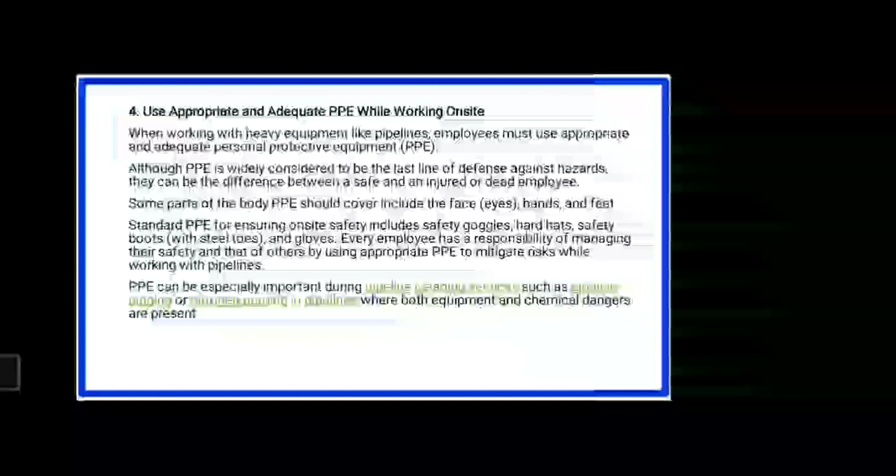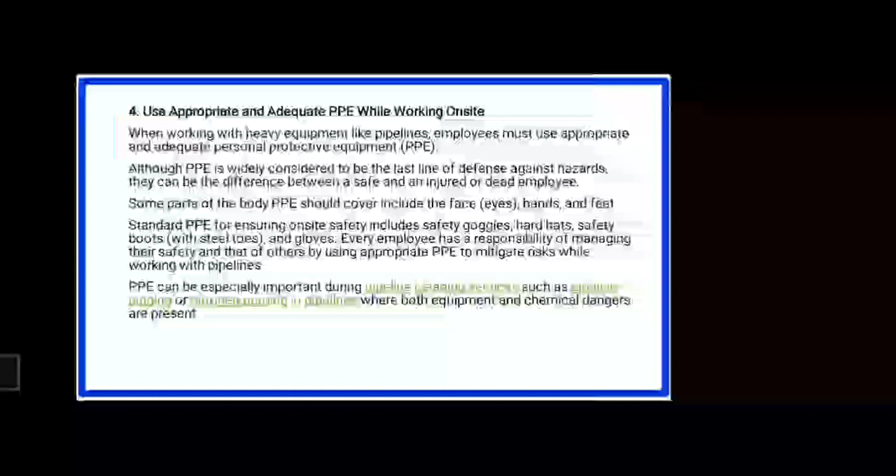We must take care about the PPEs, especially important during the pipeline cleaning services, pipeline pigging process, and nitrogen purging process. The fifth point is ensure adequate training for operators of heavy duty machineries.

So when there is a need of excavators, forklift trucks, some other trucks, cranes, etc., for operating these types of heavy duty machineries, the operator should go through specific training and they should follow the operations and maintenance manual to avoid any type of incident or accident.

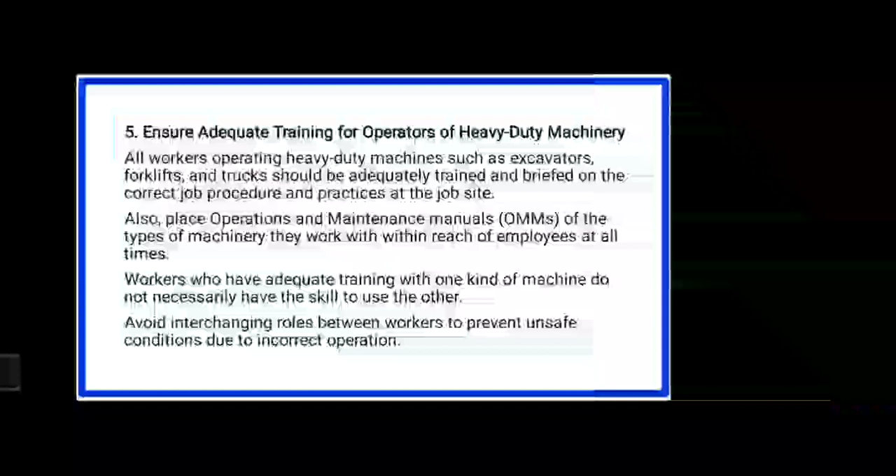The sixth one is inspect all tools used on site. While operating these types of heavy duty machineries, while operating excavation activities, while doing various types of works, we need specific tools.

Before starting the actual job, we must go through the toolbox talks. And in these discussions also, we should inspect all these types of tools before utilizing them on-site.

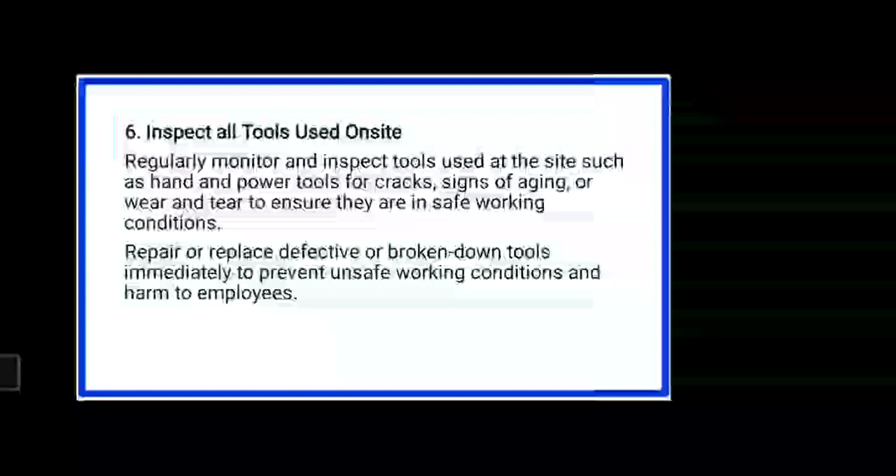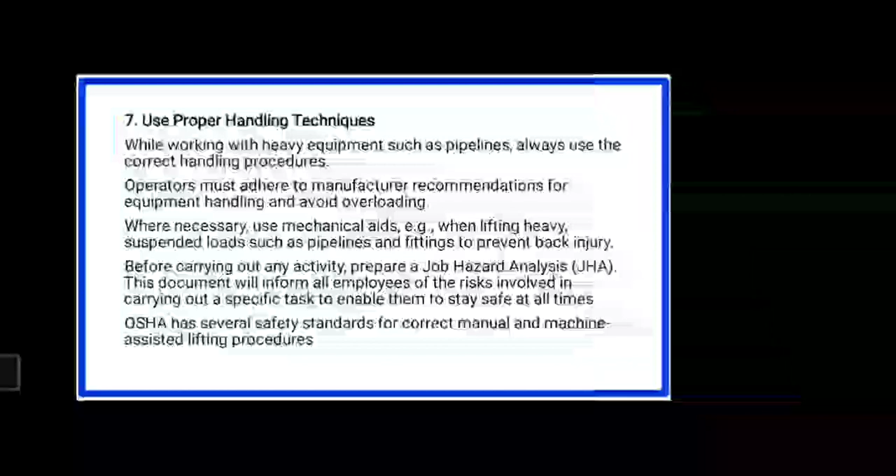The seventh point is use proper handling techniques. While doing different activities on-site, especially pipeline activities, when we are lifting heavy suspended loads because there are heavy pipelines and fittings, if we are doing all these things manually, then there are chances of back injury.

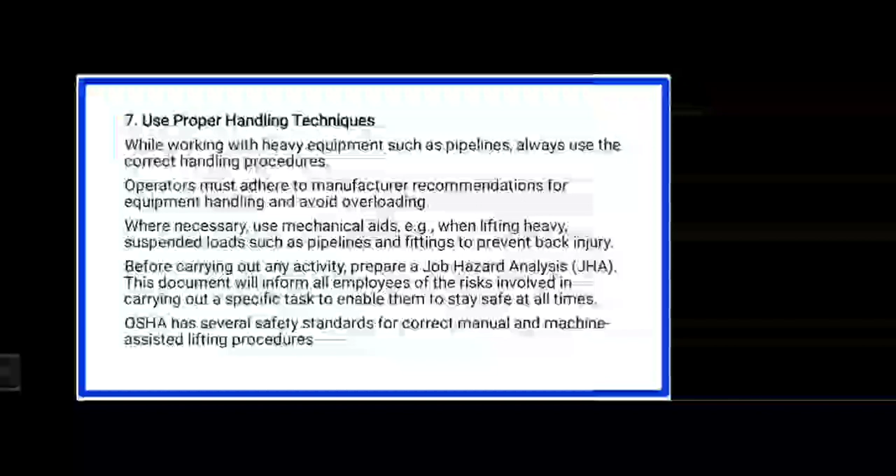But if it is done by heavy cranes, then we can avoid the ergonomic hazard. So for each and every activity, we must go for the job hazard analysis so that we can reduce or eliminate the risk and avoid different types of hazards.

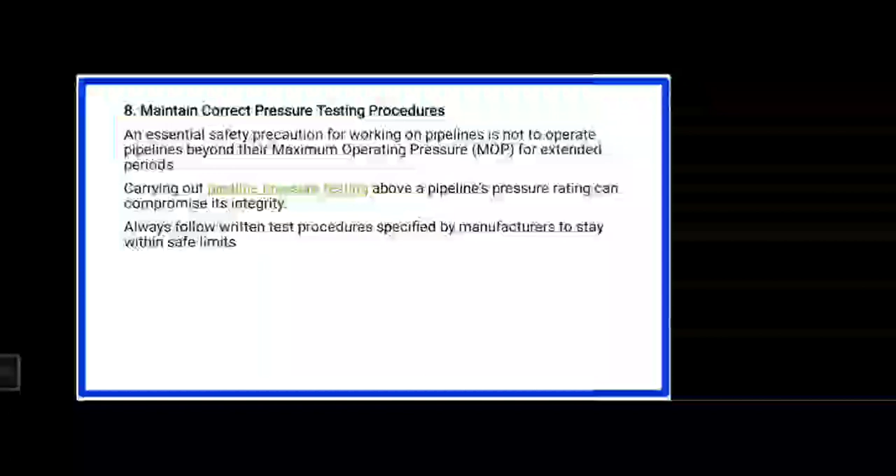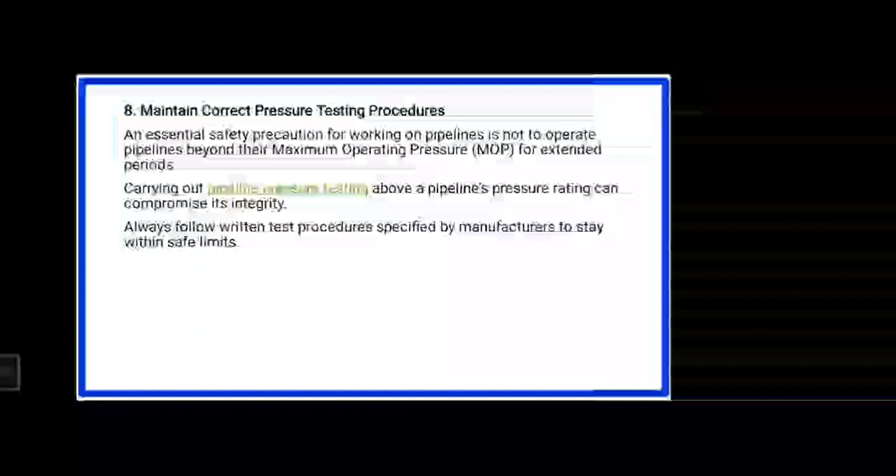The next point is maintain correct pressure testing procedures. As discussed in the pigging process, cleaning process, servicing process, or nitrogen purging process, there are different operations which need specific testing guidelines and specific testing pressure, given under different acts, rules, or standards. We have to follow all these standards or rules and regulations while testing these equipment or processes.

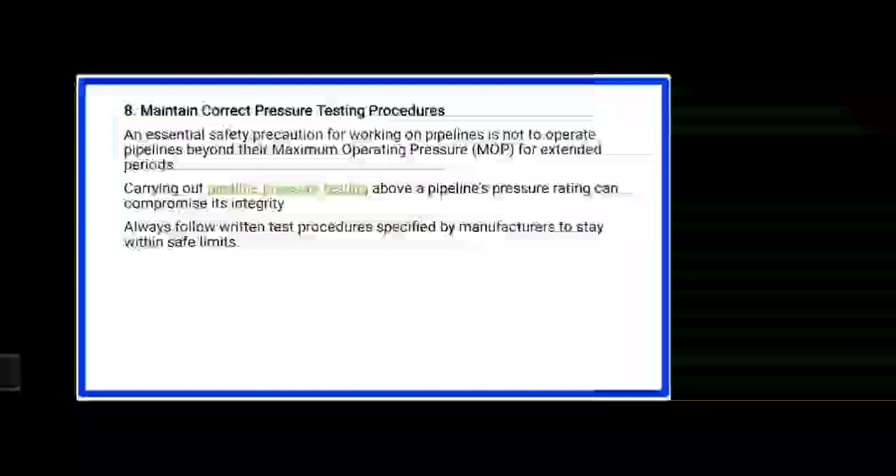Then there is a main parameter called preventive maintenance. We all know that if there is a breakdown or emergency, that maintenance activity is called breakdown maintenance or emergency maintenance. But if you want to avoid any type of maintenance on the 11th hour or after breakdown, then we must go for preventive maintenance.

Prevention is better than cure. That phrase we know, and on that basis only this preventive maintenance can be worked out.

We have to observe and supervise each and every operation, each and every activity, so that we can easily predict that this particular process or machinery requires lubrication, this requires replacement, this requires replacement of a small component, or that may be isolation, etc.

Whatever it may be, we have to observe each and every activity and predict some of the maintenance process, and that should be done under this preventive maintenance.

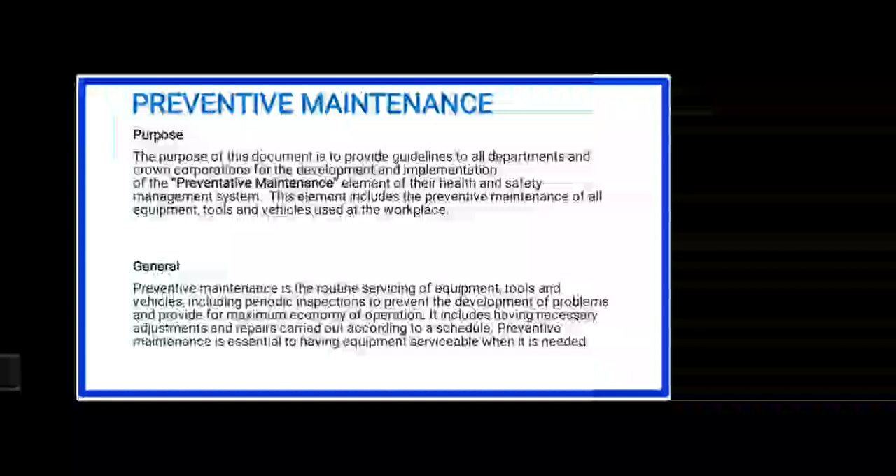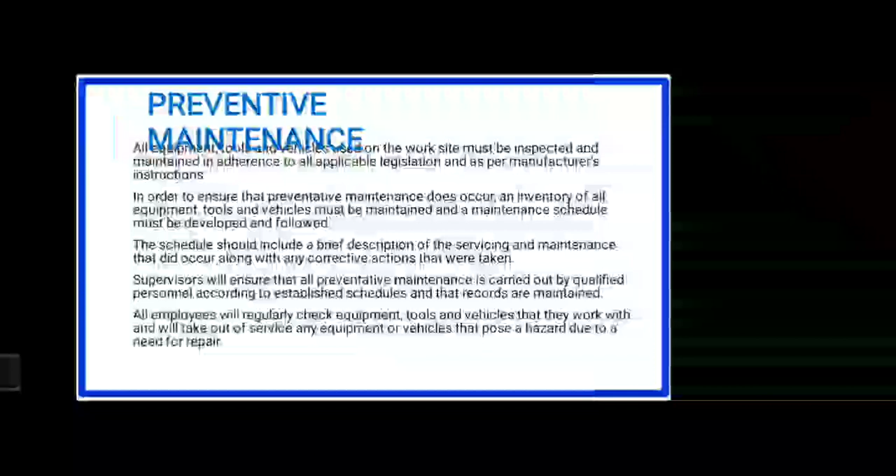Under this preventive maintenance, all equipment, tools, and vehicles used on the work site must be inspected and maintained in adherence to all applicable legislation and as per the manufacturer's instructions.

In order to ensure preventive maintenance does occur, an inventory of all the equipment, tools, and vehicles must be maintained, and a maintenance schedule must be developed and followed.

Planning, execution, and repetition of these activities is very important, and that is why micro level supervision, micro level observation and planning is one of the skills in preventive maintenance. Supervisor's observation is very important in this type of preventive maintenance.

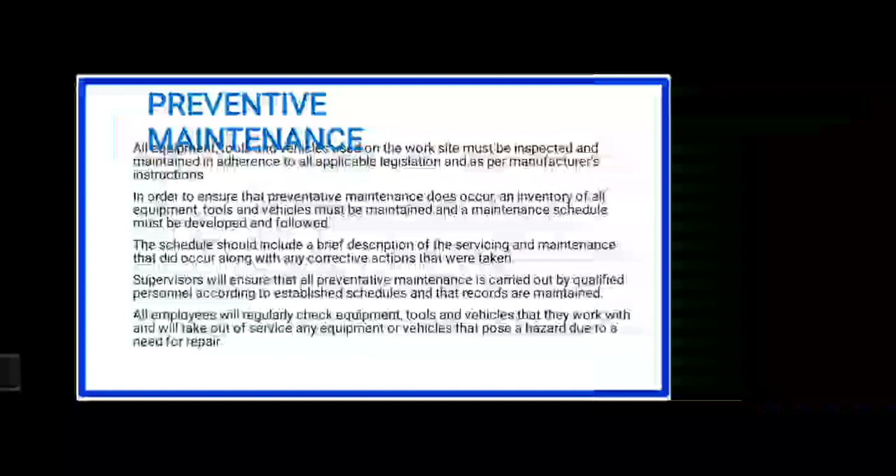Then another maintenance type is emergency maintenance. It is a type of reactive maintenance because we are doing the maintenance after an emergency situation, used to prevent a threat to lives, property, profitability or viability of an organization.

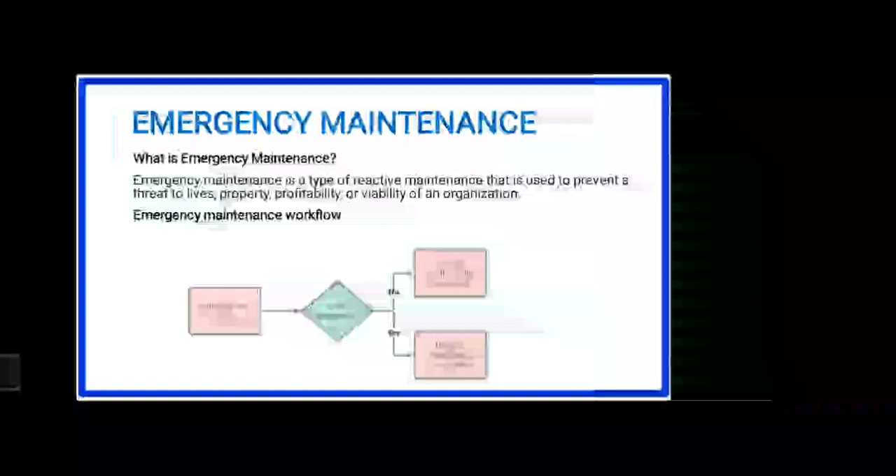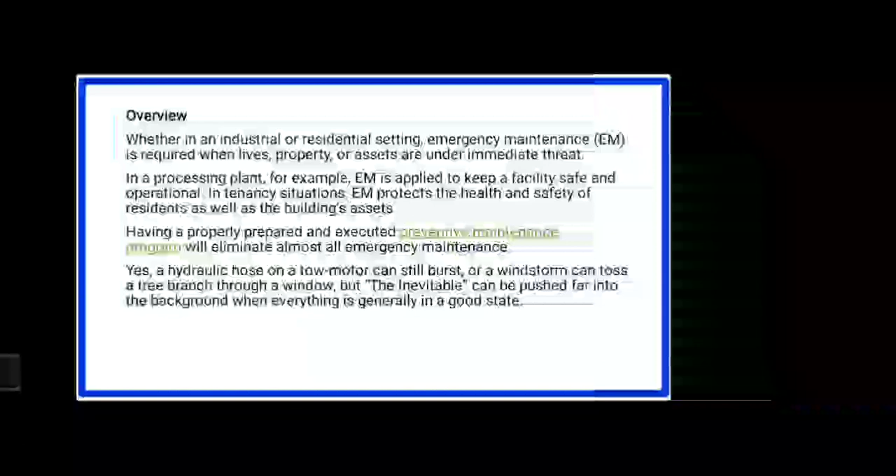So whether it is in industry or in residence, emergency maintenance is required when lives, property or assets are under immediate threat. We have to go for this emergency maintenance on the first priority.

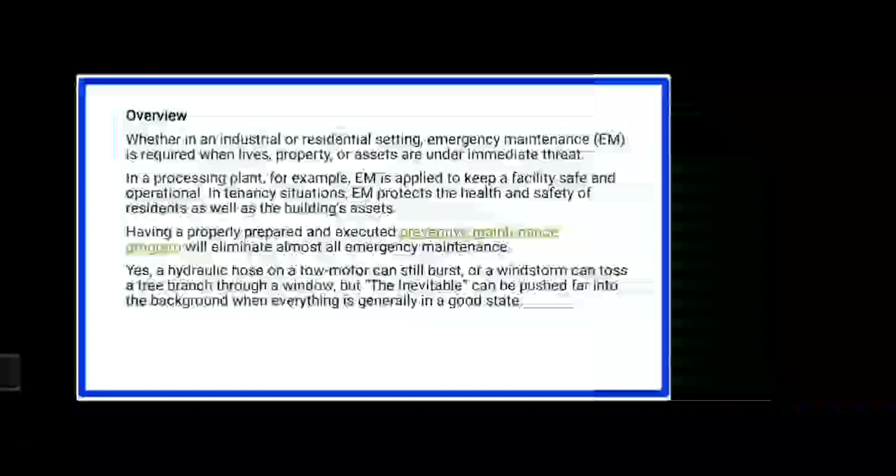Preventive maintenance can be a program which can avoid or eliminate this type of emergency maintenance. So if you plan and execute properly, that is the preventive maintenance, then in most cases we can avoid this emergency maintenance.

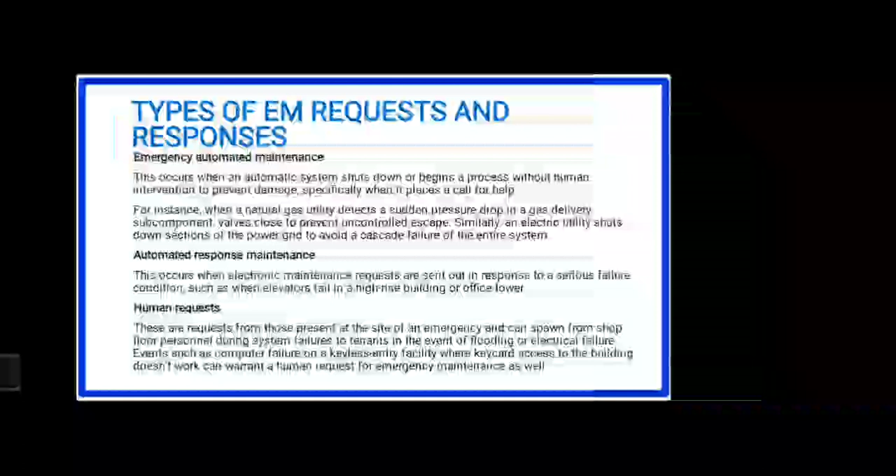Sometimes it is the system which can automatically handle this situation like emergency maintenance, and sometimes only the response is there and we have to decide whether the emergency maintenance is called or not. And sometimes human beings or the employees are indicating that this is an emergency situation.

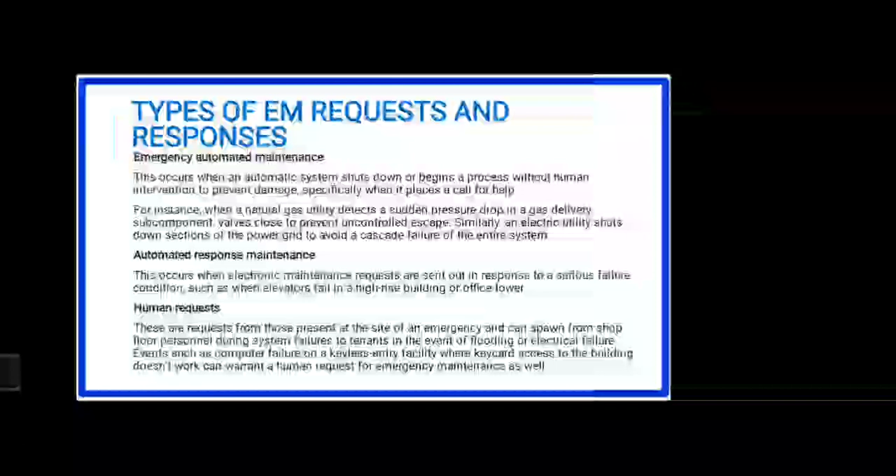Depending on the conditions and situations, we have to handle these types of requests. So the competent person or the expert person is going to decide whether this request is accepted or rejected.

And how to avoid an emergency maintenance situation? First, distinguish between the costly emergency maintenance and urgent maintenance. Emergency maintenance needs immediate attention, even on a Sunday at double time and a half.

That is why in nearly all industries, the maintenance people are present in the industry every day, and that is why the weekly off is on a cycle basis. So if the weekly off of a particular company is on Saturday or Sunday, the maintenance people are still present on Saturday and Sunday, and their weekly off may be other than Saturday and Sunday.

This is because if any emergency situation arises, the maintenance people are going to handle these types of situations. So urgent maintenance can wait for normal business hours.

In a tenancy situation, if a toilet is clogged but the unit has another functioning toilet, it is urgent rather than emergency. So we must clearly understand what exactly urgent is and what is emergency. If an elevator is out of service and no one is trapped inside while other elevators remain functional, it is urgent rather than emergency.

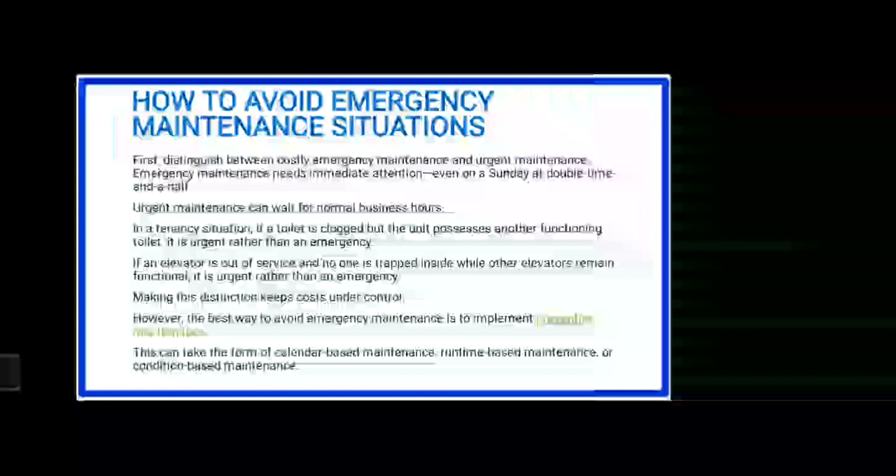Again, if the preventive maintenance is better in your company, then normally we can avoid these types of situations, whether urgent or emergency.

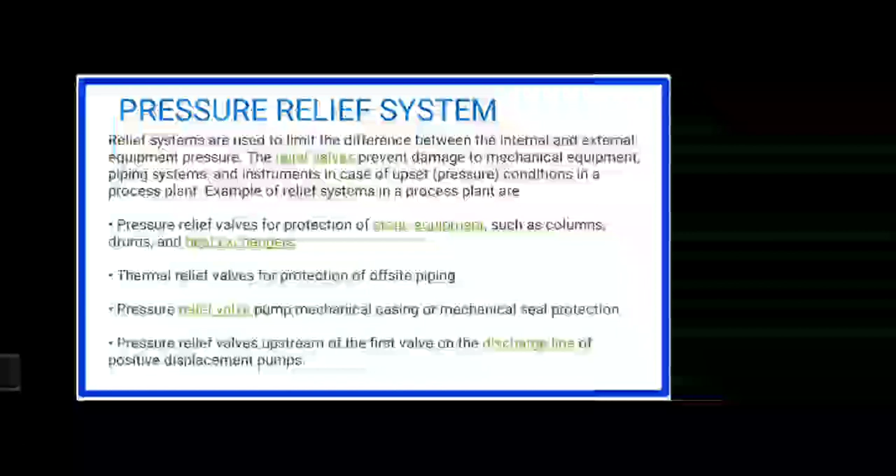Then there is another element called the pressure relief system. Relief systems are used to limit the difference between the internal and external equipment pressure. The relief valves are utilized for these pressure relief systems to prevent damage to mechanical equipment, piping systems, and instruments in case of upset conditions, that is pressure conditions in a process plant.

Examples of these relief systems are pressure relief valves for protection of static equipment, such as columns, drums, and heat exchangers. If you take an example of a chemical industry, there may be a distillation column, a gas absorption column, or nowadays in most effluent treatment plants, the scrubber system is always there. So sometimes we have to take care about these types of systems.

In heat exchangers, that may be a shell and tube heat exchanger, graphite plate heat exchanger, or other types of heat exchanger, there will always be pressure, especially when we are talking about boilers, pressure vessels, etc. So all these equipments are examples of pressure systems.

In these pressure systems, we have to use the pressure relief system. So in case of emergency, or if you want to avoid any type of damage, we have to operate this pressure relief system manually, semi-automatically, or automatically.

Then another example is thermal relief valves for protection of offsite piping, then pressure relief valve for pump mechanical casing or mechanical seal protection, then pressure relief valves upstream of the first valve on the discharge line of the positive displacement pump.

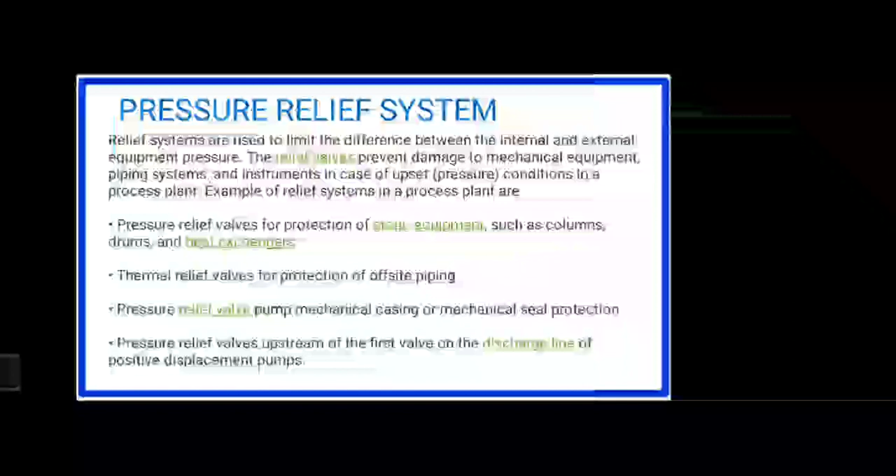So these are the different examples of these pressure relief systems. We have to understand that the main purpose is to avoid damage, to avoid accidents with the help of this system. So there are different recommendations at global level, at national level, and there may be some specific guidelines at the state level or regional level also.

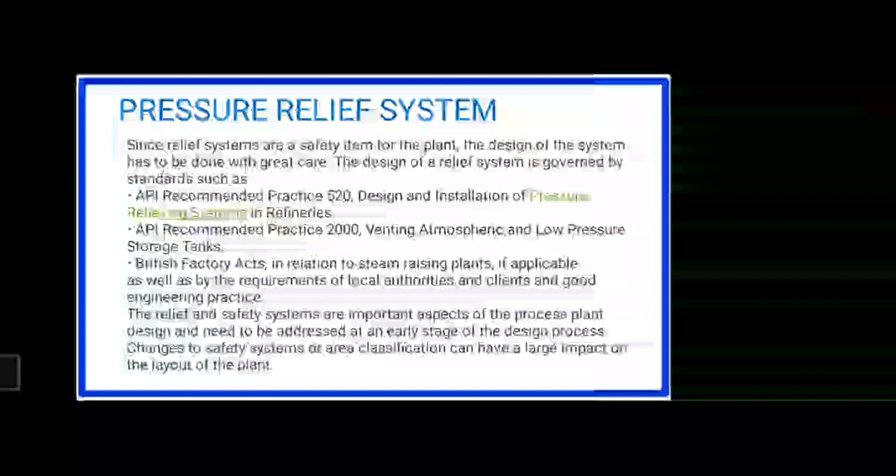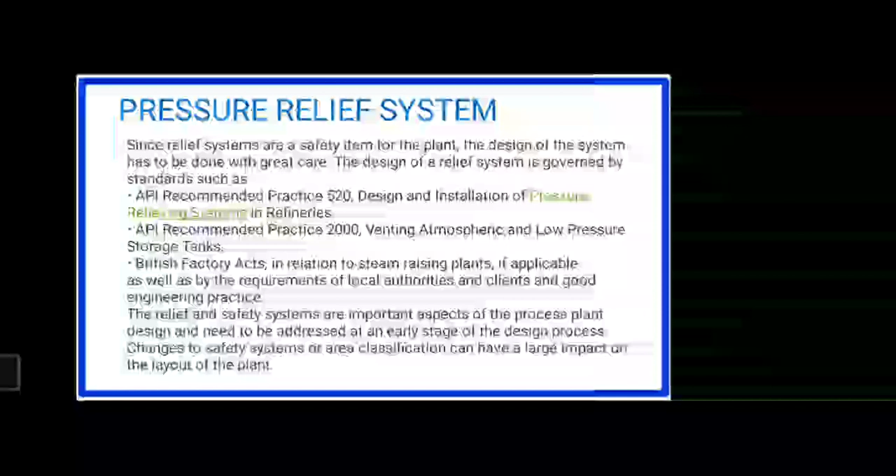So these are some of the general guidelines like API recommended practice 520, design and installation of pressure relieving systems in refineries. Then API recommended practice 2000, venting atmospheric and low pressure storage tanks. Then British Factory Act recommended the steam raising plants if applicable, as well as different types of requirements. Whatever the requirement given by different guidelines and standards, we have to follow them to avoid damage and accidents.

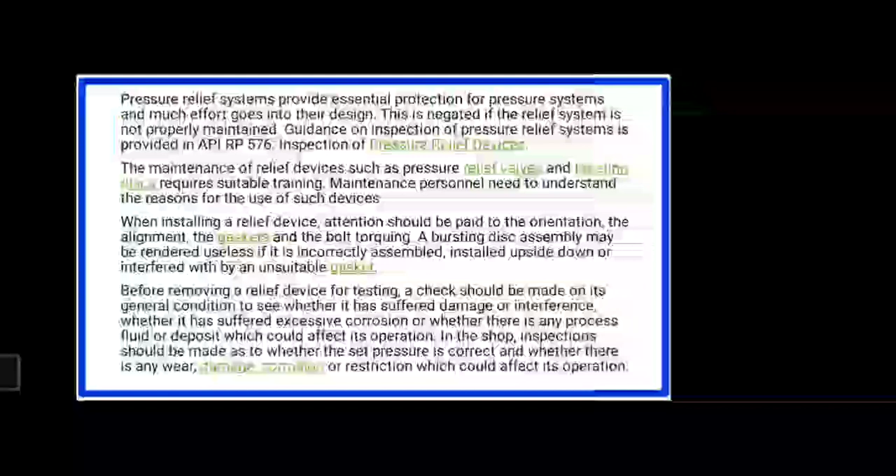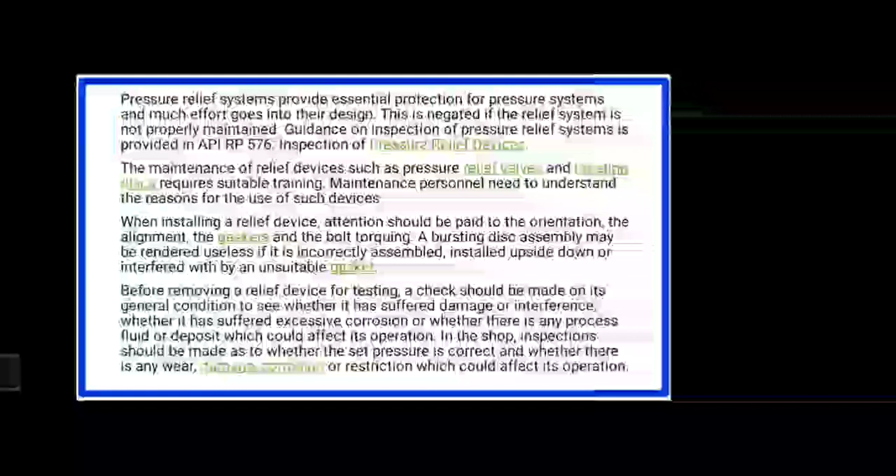So these are the different examples of different guidelines like API RP 576, pressure relief systems, then relief valves, bursting disc, then gaskets etc. These are the different components which can be utilized in the pressure relief system to release the pressure from that equipment, from that system, and we can easily avoid the damage. You can go through these videos for the details of this pressure relief valve, how it operates.

Then another component is the breather valve. Breather valves are known as direct acting pressure or vacuum relief valves, a special type of relief valve. We have already discussed pressure relief valves. Now it is a breather valve, similar type of pressure relief valve, but specifically designed for tank protection. Before, in the previous slides, we discussed things in a general form. Now this breather valve is related to tank protection only.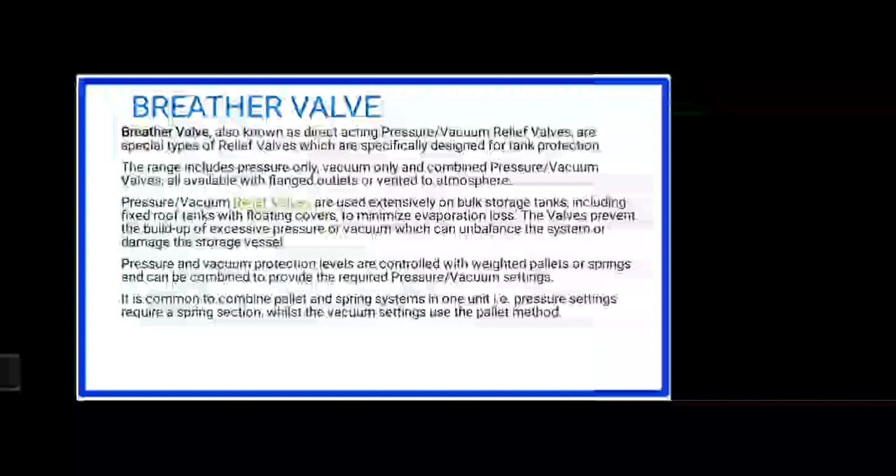So the range includes pressure only, vacuum only, and combined pressure or vacuum valves. All available with flanged outlets or vented to the atmosphere. These relief valves are used extensively on bulk storage tanks, including fixed roof tanks with floating covers, and to minimize evaporation losses also.

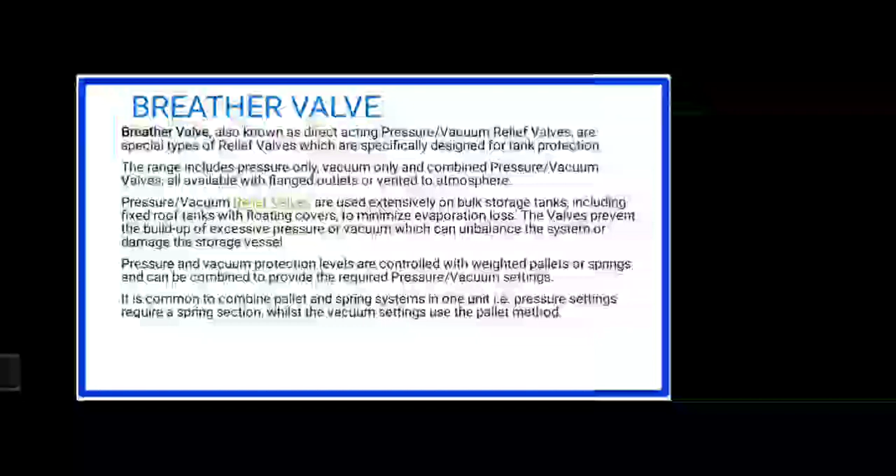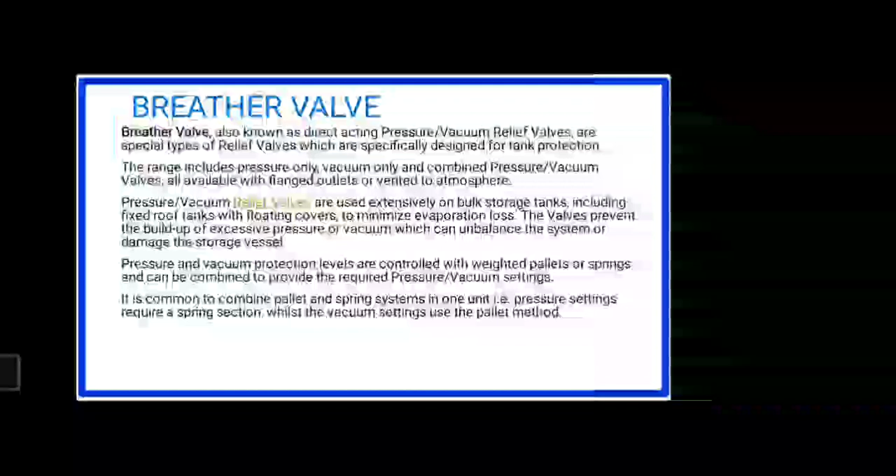So we have to balance these things, that we have to relieve this pressure, but we have to protect against evaporation loss, or we have to protect material loss. So we have to design these types of breather valves in such a way to balance the economical losses also, as well as to release or reduce the pressure.

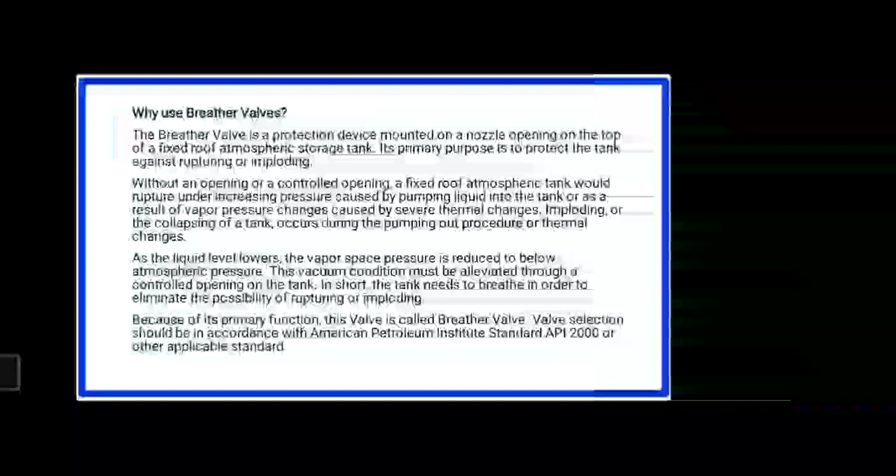Why are we going to use these types of valves? Because it is a protection device mounted on a nozzle opening on top of a fixed roof. So for atmospheric storage tanks, we are going to use these breather valves. Its primary purpose is to protect the tank against rupturing or imploding. We have to avoid this implosion or rupture or damage of the tank. Without an opening or controlled opening, a fixed roof atmospheric tank would rupture under increasing pressure, and this situation we are going to avoid with the help of this breather valve.

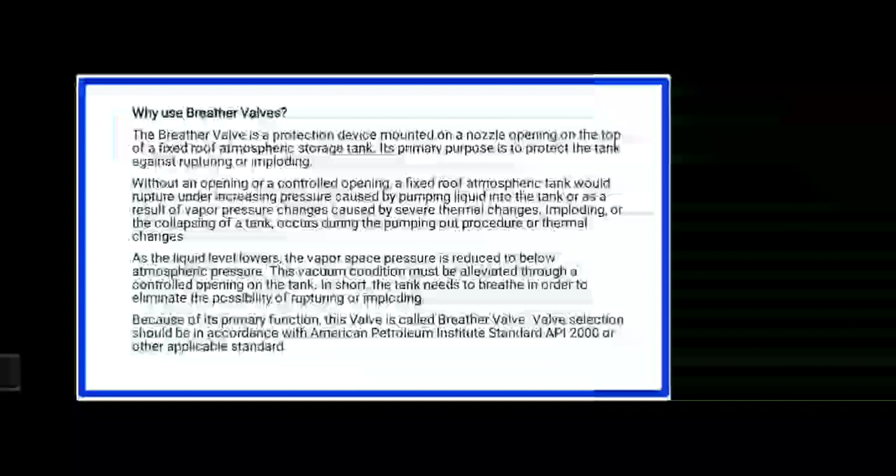So some standards are also mentioned. With reference to these standards, we can go for these breather valves. So we have already discussed how these breather valves are going to protect our tank.

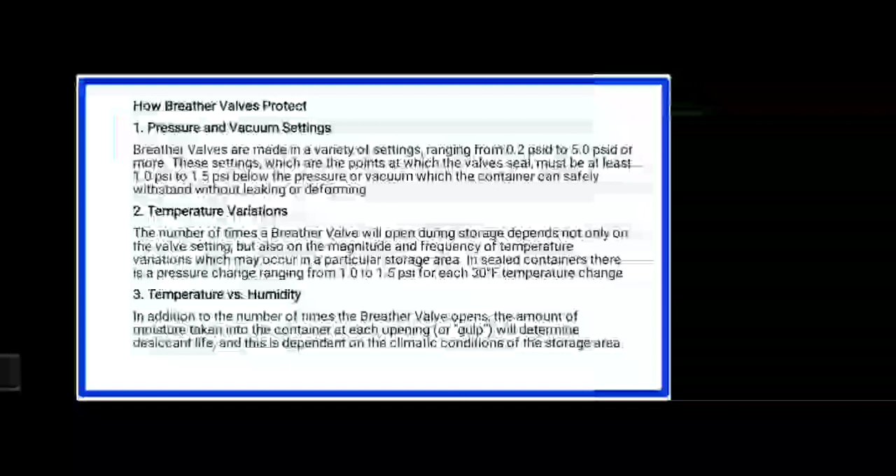So these are some of the specific guidelines, like pressure and vacuum setting, that is from 0.2 psid to 5 psid or more, and that valve seal pressure is 1 psi to 1.5 psi. Then temperature variations: pressure change ranging from 1 to 1.5 psi for each 30 degree Fahrenheit temperature change. And then temperature versus humidity - if the humidity criteria controls this temperature, then again we have to take care about this pressure range. So climatic conditions also change the pressure and temperature conditions.

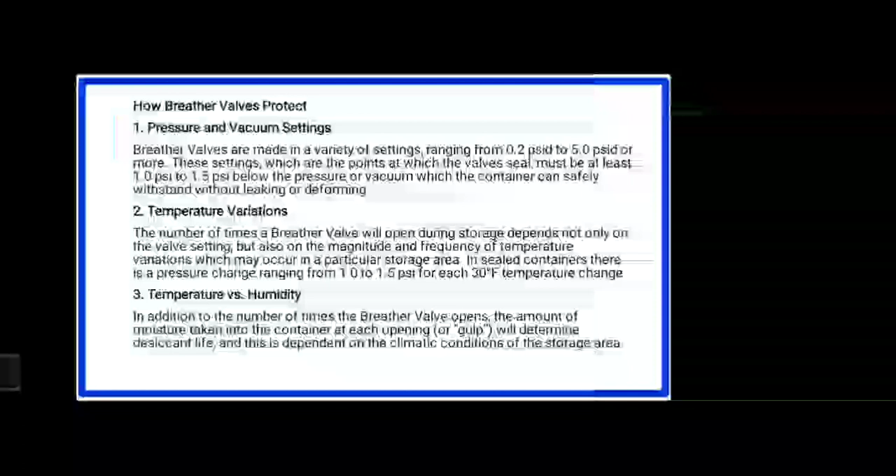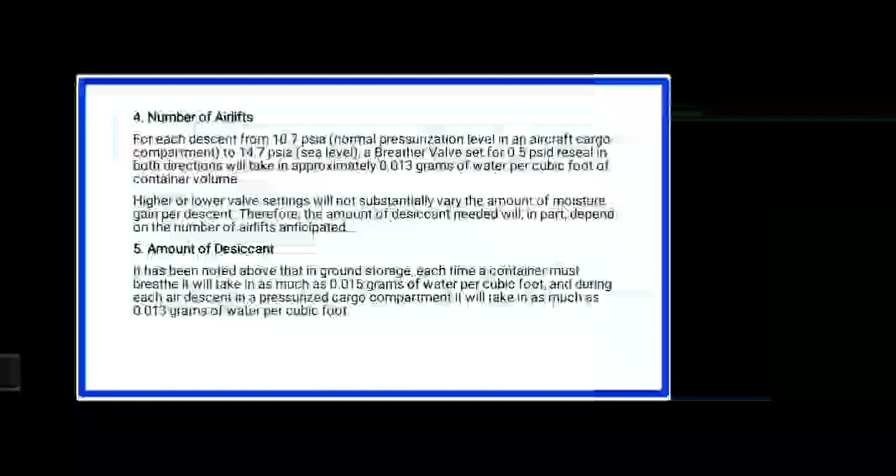Then number of airlifts: for each descent from 10.7 psia to 14.7 psi - psi means pound per square inch, A means absolute, G means gauge pressure. We can easily convert these ranges into SI units or MKS units also. Then amount of desiccant - that is another criteria.

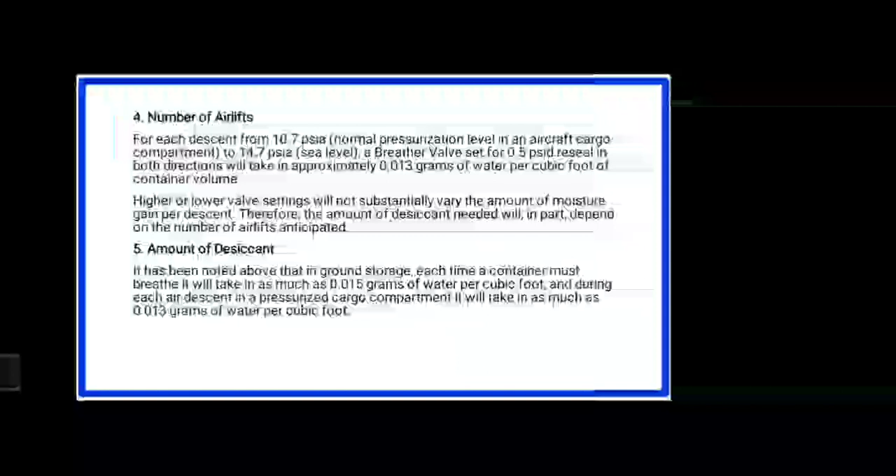It has been noted that in ground storage, each time a container must breathe, it will take in as much as 0.015 grams of water per cubic feet. And during each air descent in a pressurized cargo compartment, it will take in as much as 0.013 grams of water per cubic feet. So we have to also consider this much water while breathing these tanks.

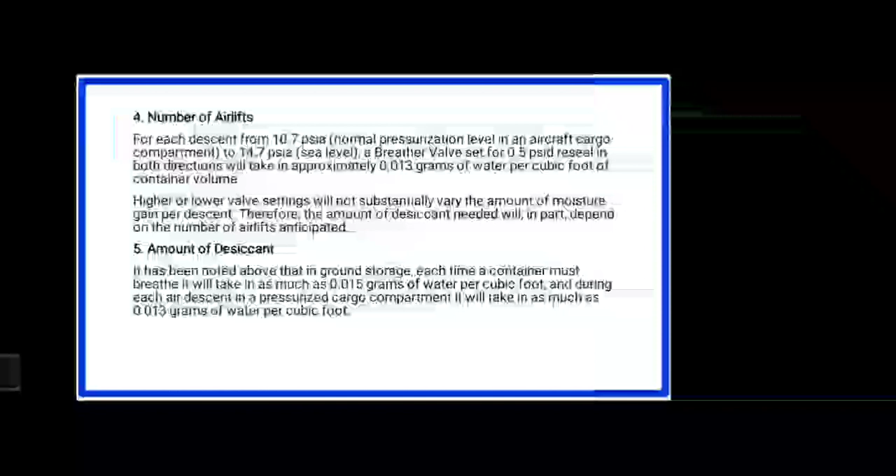You can go through the details related to these breather valves through this YouTube video.

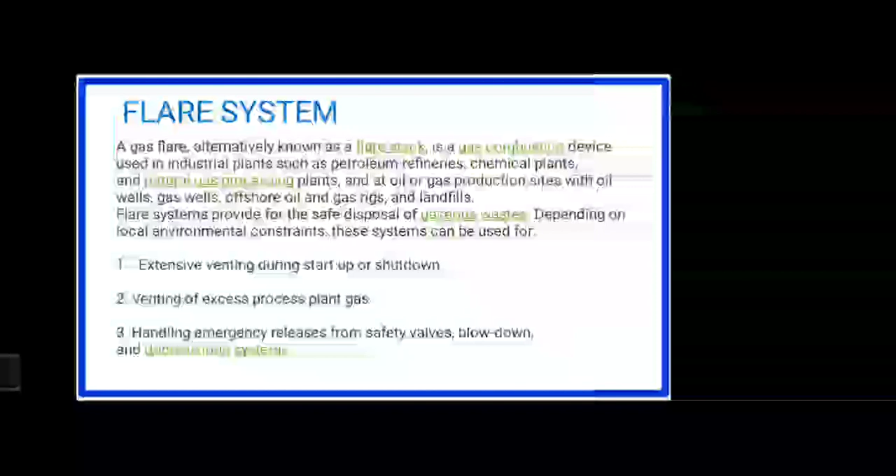Then there is another system called the flare system. A gas flare, alternatively known as flare stack. We normally know these systems in an ETP plant, in a refinery plant, or in a chemical industry, where the excess gas can be burned with the help of flare, and that is why it is called flare systems.

In petroleum refineries, chemical plants, natural gas processing plants, oil and gas production sites, oil wells, gas wells, offshore oil and gas rigs, and landfills - these are the different locations or regions where flare systems can be utilized.

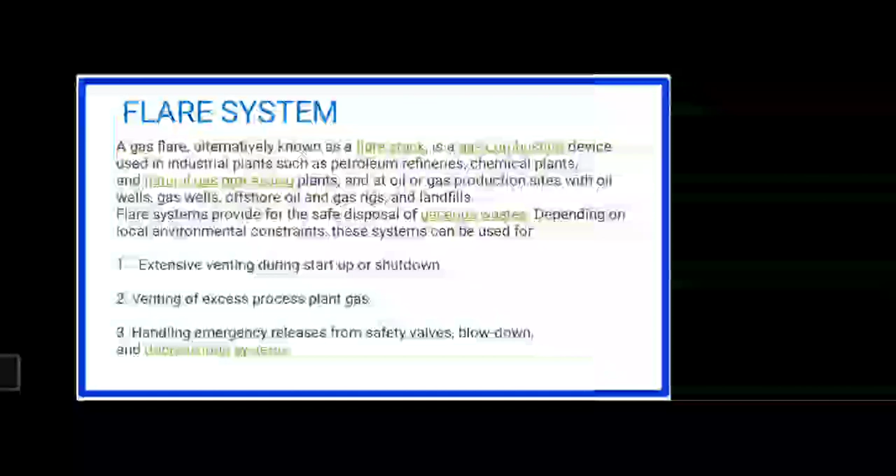Depending on the local environment constraints, this system can be used for extensive venting during startup or shutdown, venting of excess process plant, and handling emergency releases from safety valves, blow down, and depressurizing systems. Depending on the requirement, sometimes excess gas is produced in a plant, and we have to burn it before sending it to the atmosphere, because some gases are more toxic or poisonous if sent directly rather than after combustion. So we have to burn these gases.

When we are talking about this flare or combustion system, there should be three elements of the fire triangle: oxygen is always present, then we have to give the spark or ignition source, and then the fuel - fuel being nothing but the excess gas.

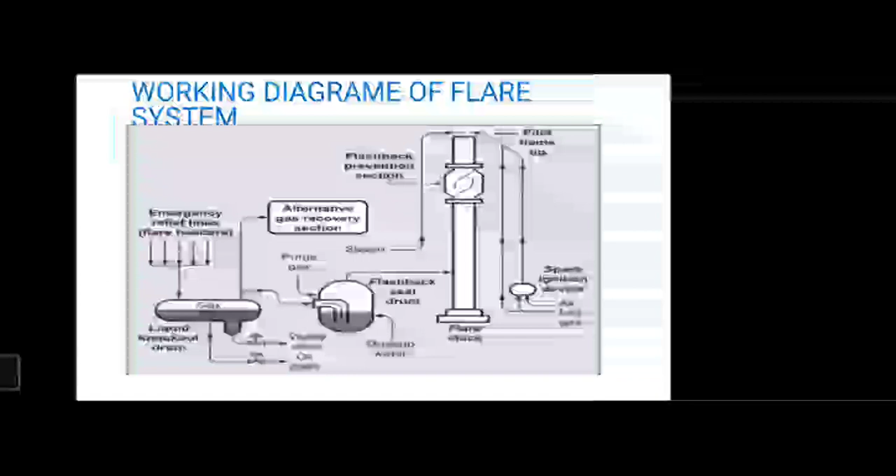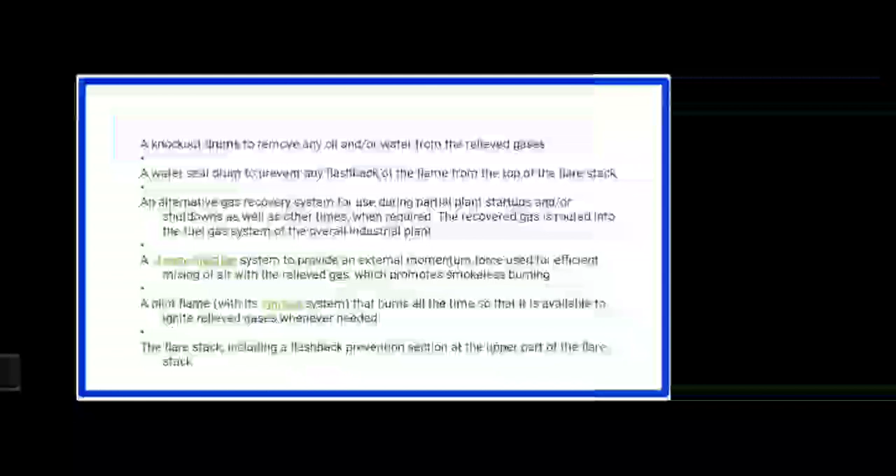This is the mechanism of this flare system, given in detail. You can go through this video for how to operate this flare system.

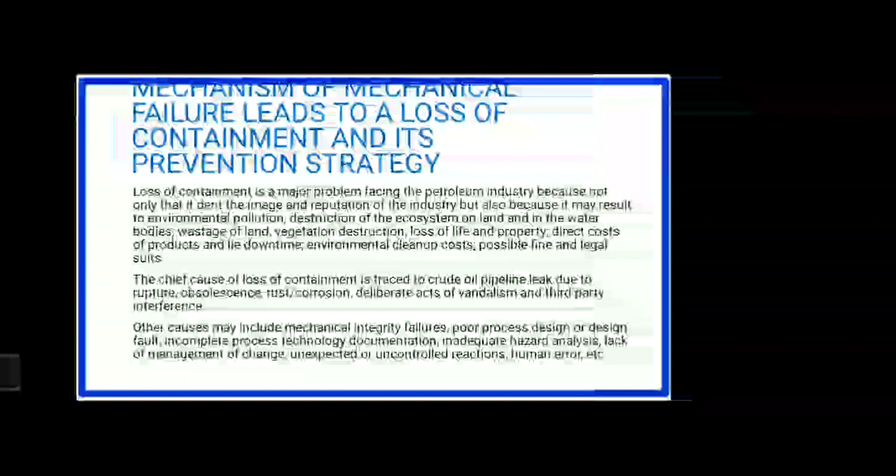This is the mechanism of mechanical failure leading to loss of containment and its prevention strategy. Sometimes there is a loss of containment, which is a major issue in refineries. This petroleum industry faces this problem because not only does it dent the image and reputation of the industry, but it may also result in environmental pollution.

If the containment is more, then that may adversely affect the environment - in terms of air, water bodies, or the land itself. The ecosystem can also be disturbed due to these containments of special material. Depending on the petroleum products and the characteristics of that material, it can adversely affect vegetation, land, life, or property.

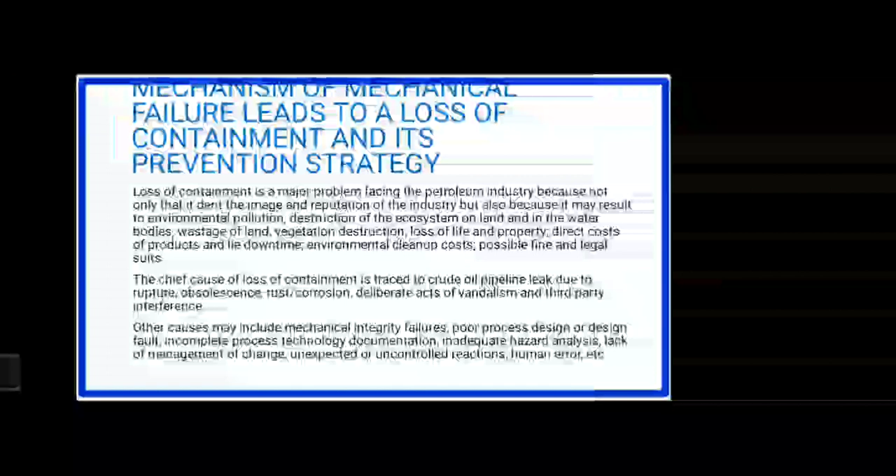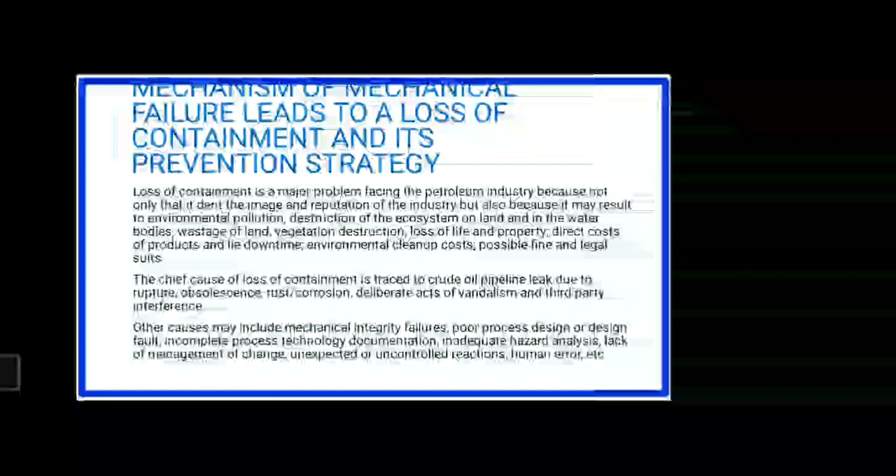So one element is the damage, and the second element is the direct cost. We have to take care about these things to avoid the loss of containment of these types of materials.

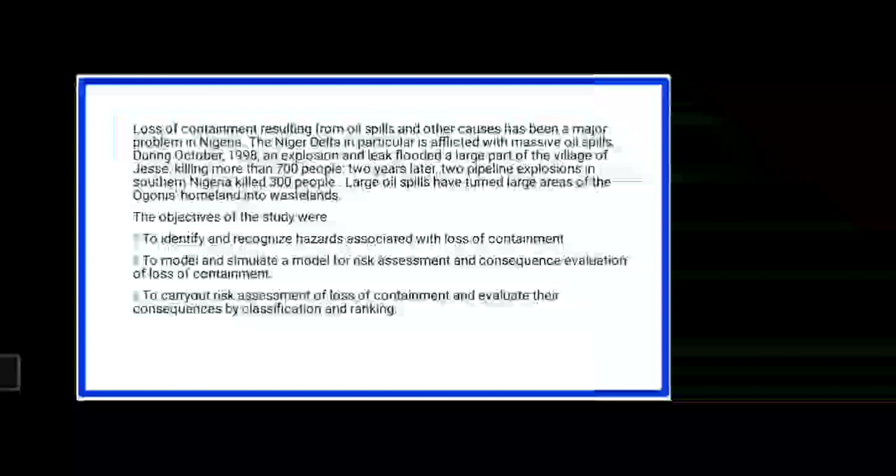We must study the different types of hazards associated with the loss of containment. Then we have to check and simulate a model for the risk assessment and consequence evaluation of loss of containment, and then carry out risk assessment criteria to reduce the risk as well as the hazard.

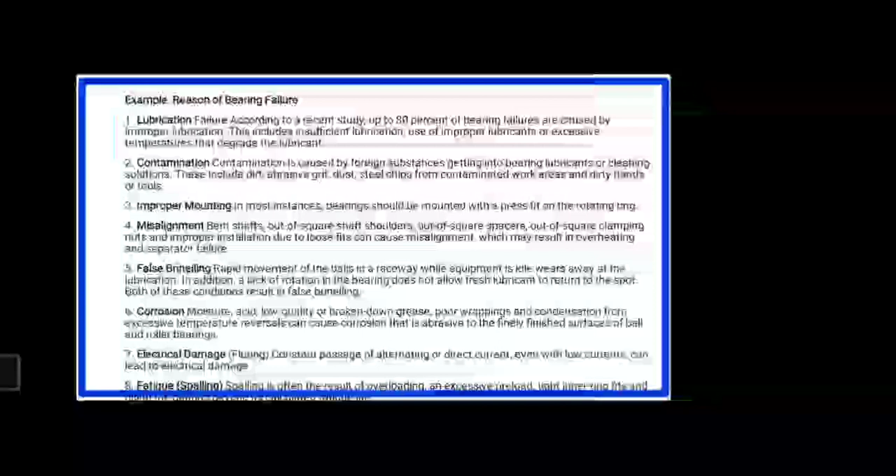These are some examples where we can identify the general reasons for bearing failure. This is one of the major reasons, and these are the different points due to which bearing failure can happen - like lubrication, contamination, improper mounting, misalignment, false brinelling, corrosion, electrical damage, fatigue or spalling. These are the general points which can cause bearing failure in pipelines.

Then some other elements like overheating, excessive loads, improper storage and handling, and improper fitting.